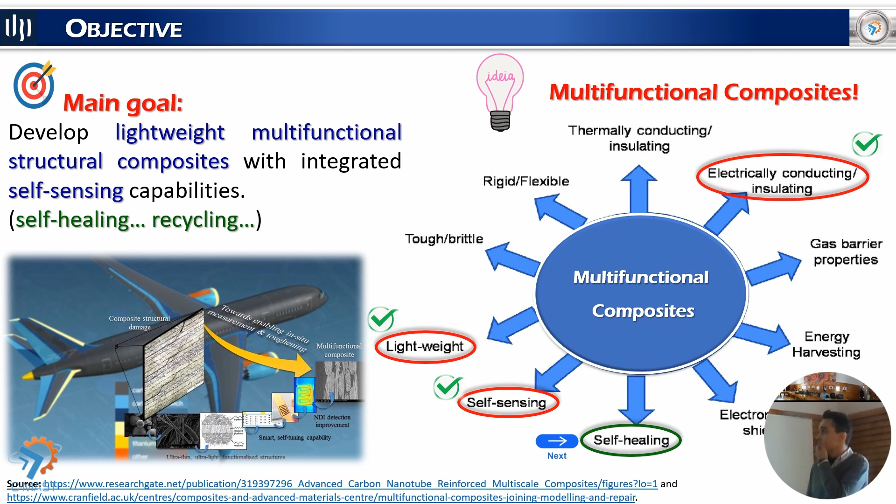This is the main goal of the project: to produce lightweight multifunctional composites that can perform the role of structural components in a specific application, for instance aerospace, aeronautics, and at the same time have the needed properties to present different characteristics and be at the same time a self-sensing system, a self-healing material, recycled - to develop multifunctional composites. The main function is structural, and the other ones give the material this idea of multifunctionality.

To understand a bit more and to introduce the importance of these topics in the advance of composite materials, I bring here some data related to the markets of composites, in this case advanced composites and fiber reinforced composites. Both markets are forecast to grow significantly in the next years in this decade, and the value of the market will grow for the next years.

This is important because we are researching new materials, new technologies in this area, and the value of this field is increasing. So probably if we develop good solutions, the possibility of application and transfer of the technology to the market is bigger, because the money being invested in these markets is also big.

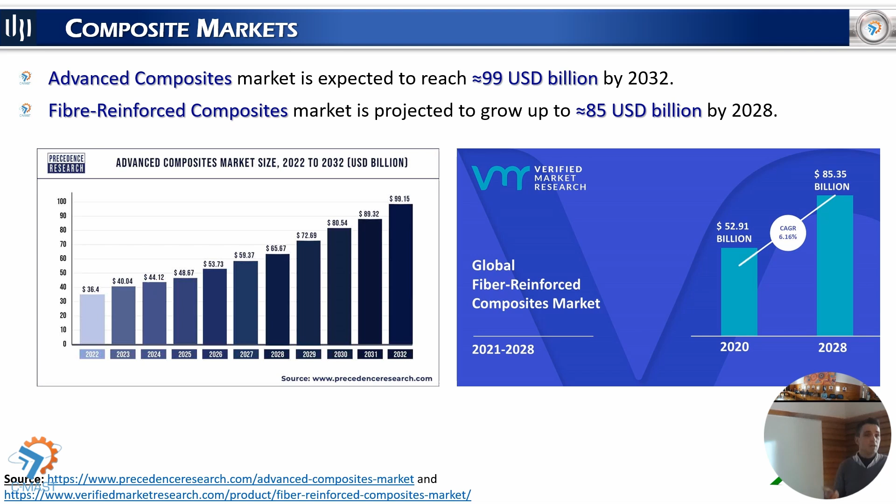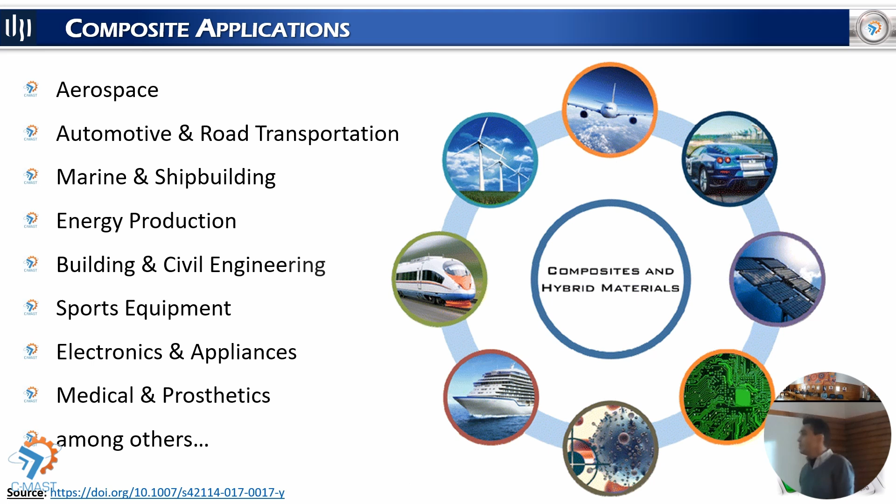These composite materials find application in different markets, in different types of industries - aerospace, automotive, probably the most representative and recognized for everybody, but also in energy production, civil engineering and building, sports equipment, electronics, medical devices, and other possibilities.

If we also analyze the numbers and the money involved in more specific markets like the marine market, wind turbines market, advanced polymer composites market, and also the aerospace market, the perspective of growth in the next years is also interesting, and the value involved in these markets will increase in the next years. This is a good perspective for us working in this type of solutions, since the market is growing and the possibilities of investment probably will increase also.

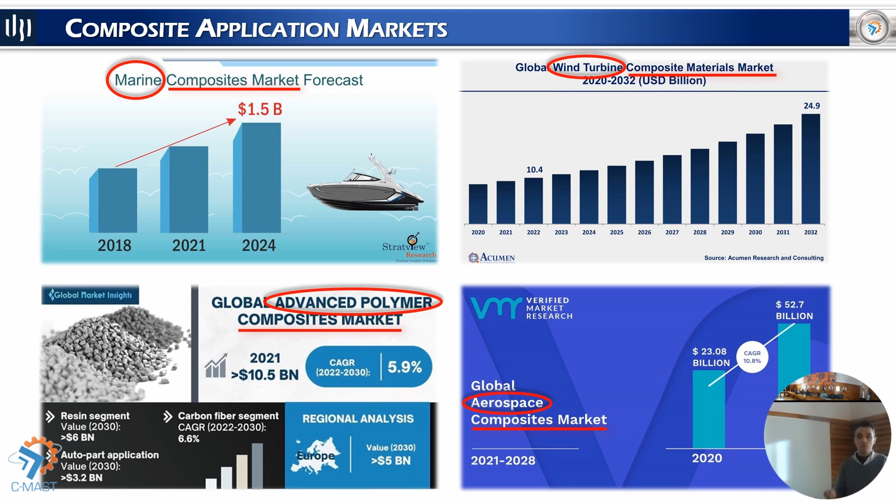Specifically the aerospace market, here we have two well-known aircrafts from two also well-known companies that present in their composition a minimum of - in this case we cannot see, but it's 50%, and here 53% - of composite materials. These numbers show the importance of this type of materials. The composite materials are being applied as half of the constitution of this aircraft. So the application of these materials is really important, as we can see here by these numbers.

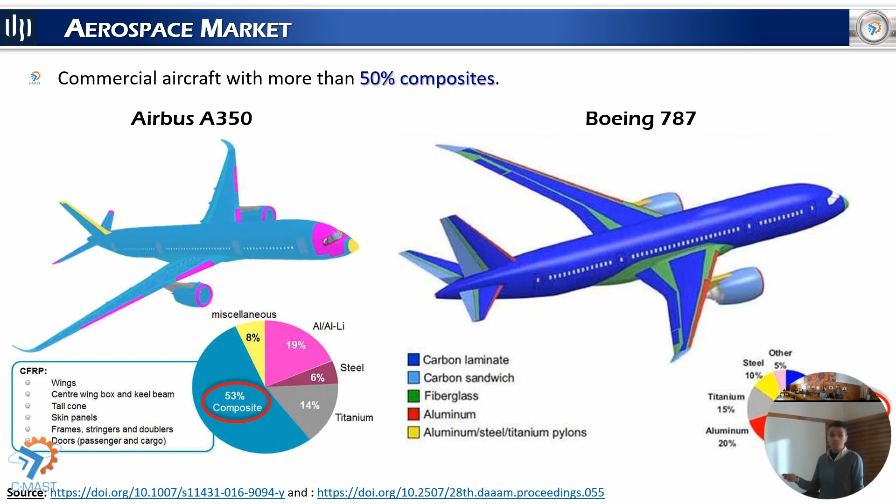Why are these composite materials so interesting for this market, and why has their application reached these levels? This is the main reason: the specific strength of this material is really high, even higher than conventional metal matrix solutions - steel, aluminum, titanium, nickel, and other metal matrices. The specific strength of polymer matrix composites is really high.

And when we are talking about the transport market, the weight of the structure is important, because less weight means less energy to move the structure, less energy consumption, less carbon CO2 emissions, and this is an important aspect of these materials and an important characteristic. This is why they are so applied.

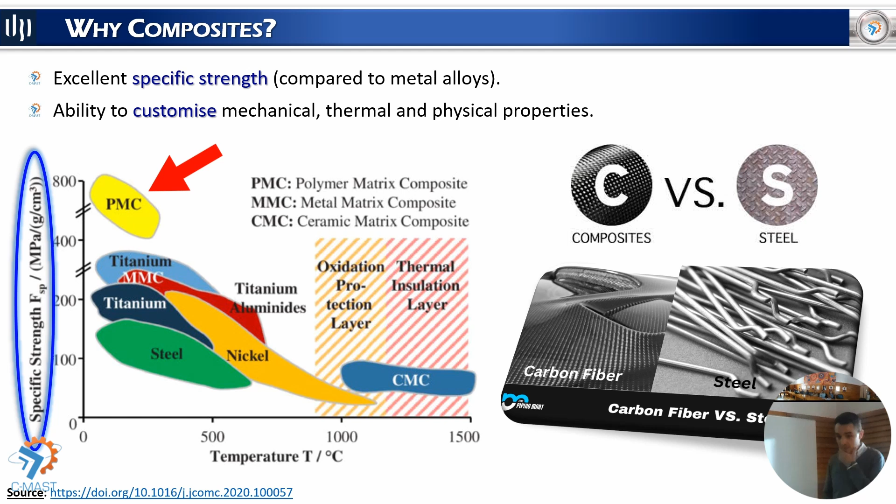However, the application of these materials has some limitations, and they present also some disadvantages. One of the main ones is their low resistance to impact. When an object impacts the structures, typically we have this type of damage propagation.

In the surface that is impacted by the object, we can see, or sometimes it's not so visible, a small indentation in the structure, in the place where the object impacts the structure. But there is a propagation of the damage through all the structure that is not visible in the upper side of the sample that is hit.

And in the opposite side of the surface that was hit by the object, typically catastrophic damage occurs. Fiber breakage, delamination, and this type of damage will really compromise the structure in its function. This is the typical damage that occurs during an impact occurrence, and this is a fragility of this type of materials.

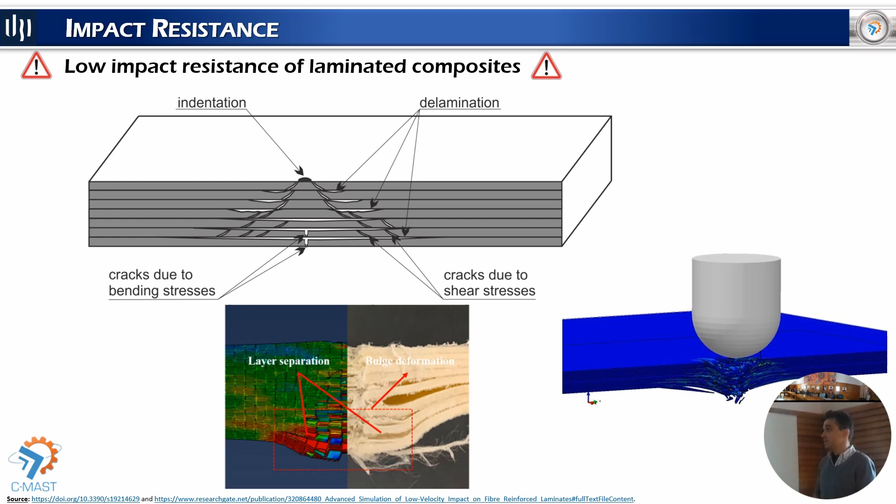Other issues and other limitations of the materials are related to the high carbon footprint that the synthetic polymers exhibit during all the life cycle of the materials, from the beginning, the petrochemical extraction, then during the utilization, and in the end of life. Typically these materials create big amounts of pollution in the water resources, in the lands, in the air, and this is also a big concern and a big limitation of the massive use of these materials.

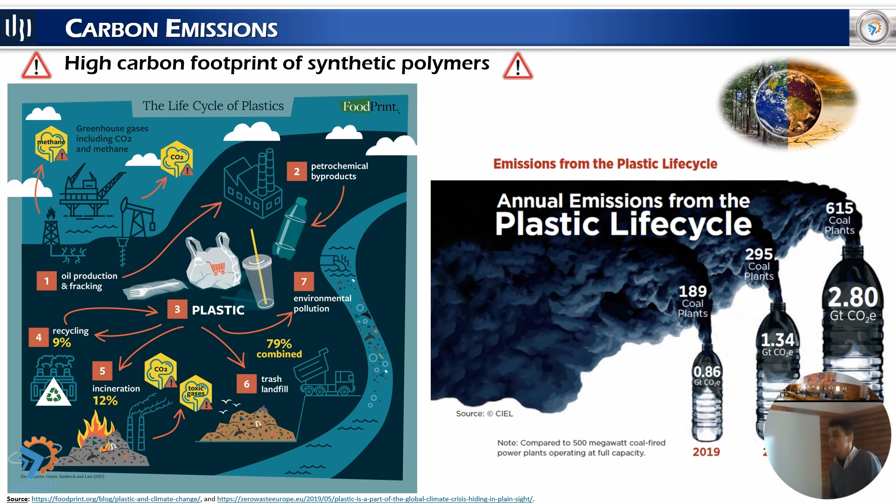So mainly these two limitations that I present are in the base of our motivation to develop this project. Our idea is to introduce the ability of self-sensing in these materials, and the structural material itself can perform what we call the structural health monitoring without the attachment of external sensors that can compromise the structure, the surface, and interfere in the aerodynamical performance of the material. So what we want is to endow the structures with the capability of becoming a sensor

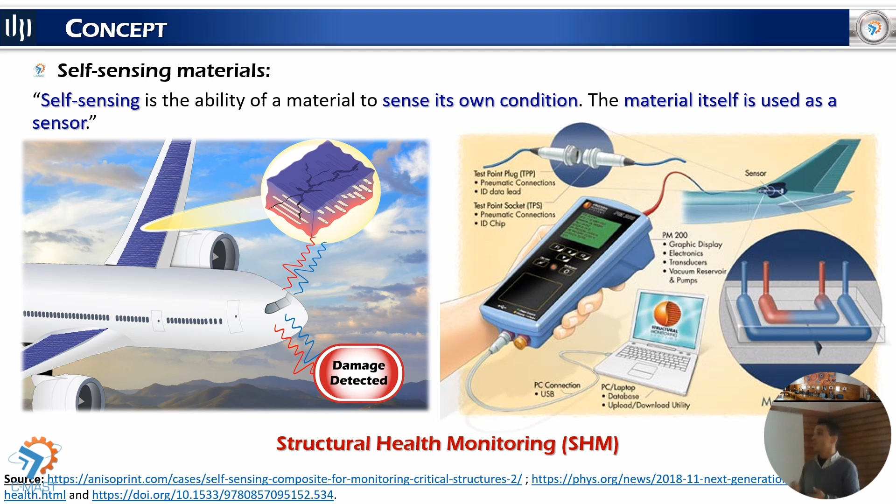itself, the structure. This is usually called self-sensing, the ability of the material to sense its own condition. The material itself is used as a sensor. So we don't need the attachment of extra sensors that can compromise the structure or affect the aerodynamical performance of the material. In our case, we are studying the piezoresistive self-sensing.

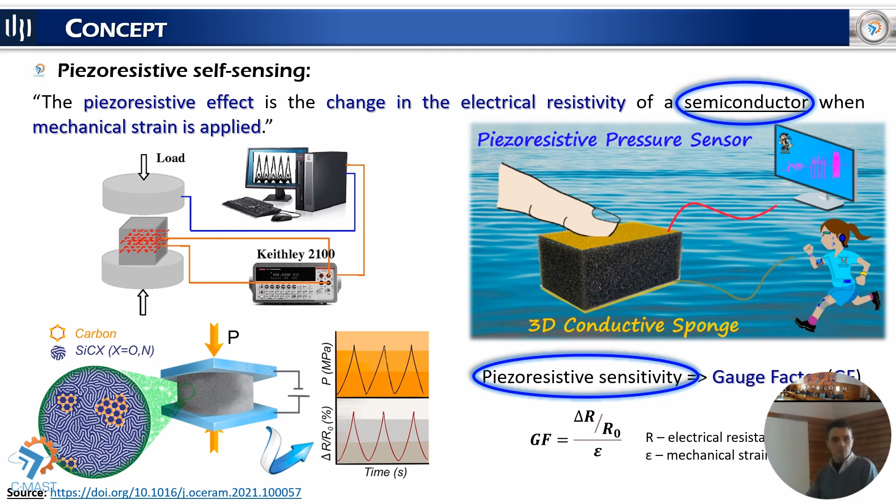The piezoresistivity is a property exhibited by some materials that consists in the change of the electrical resistivity of the material when an applied stress, when a mechanical solicitation is applied to the structure. Typically, we have here in these two graphs a representation. We have the curve of the variation of an applied stress, and the electrical resistivity also varies according to the applied stress to the structure. We will see this in more detail in the next slides.

To achieve this piezoresistivity effect in these materials, we need to change them, because typically a polymer matrix, which is the base of these materials, is an insulating material. And in this type of materials, the piezoresistive effect is not so visible or exacerbated in an amount that could be used for self-sensing piezoresistive systems.

So what we are doing is to dope and to add carbon nanotubes, which are electrically conductive particles, into the polymer matrix to make the structure semiconductive in the electrical resistance range. So initially, the polymer matrix is an insulating material. After, when we have some amounts of carbon nanotubes, the structure becomes semiconductive. And in this range, we can really observe the piezoresistive effect in the structure, and we can use it to develop the sensing solutions we are studying.

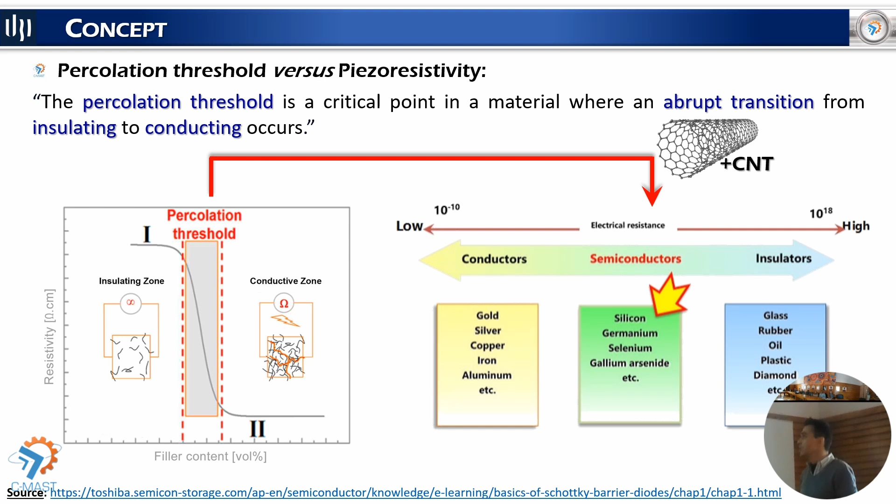The amount of carbon nanotubes that we need to add to the structures in our study is below 1% in weight. So we are talking about a very low percentage of this material.

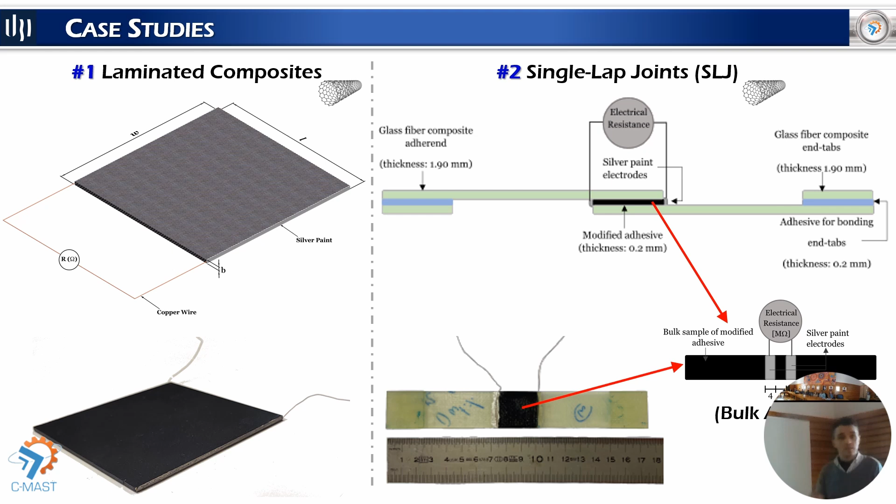So moving into the experimental results, I will present two case studies that we implemented in the laboratorial experiments. We studied this solution in laminated composites, typical composite materials used, for instance, in aircrafts and airplanes, and also in single lap joints, which is a solution very common also in aerospace structures, in cases where the bond of some components should avoid screws or the presence of holes that can compromise the structure. So we applied this concept of piezoresistive self-sensing in these two case studies.

For the manufacturing of the samples, we used glass fiber as the fiber reinforcement, carbon nanotubes as a nano-reinforcement, and the polymer matrix was a conventional epoxy resin. For the first case study, the laminated composites, we produced two sets of layered glass fiber composites. The first one, 12-layer composites of glass fiber epoxy, so pure epoxy with glass fiber reinforcement. This is the control sample. And in the samples in which we studied the piezoresistive effect, we had the epoxy resin with 0.5% by weight of carbon nanotubes.

For the second case study, we produced first the adhesive we used to bond the adherends. We studied the bulk adhesive with 0.5% of carbon nanotubes, and then we used this adhesive to produce bonded single lap joints with epoxy resin with 0.5% carbon nanotubes, and we used adherends of glass fiber also.

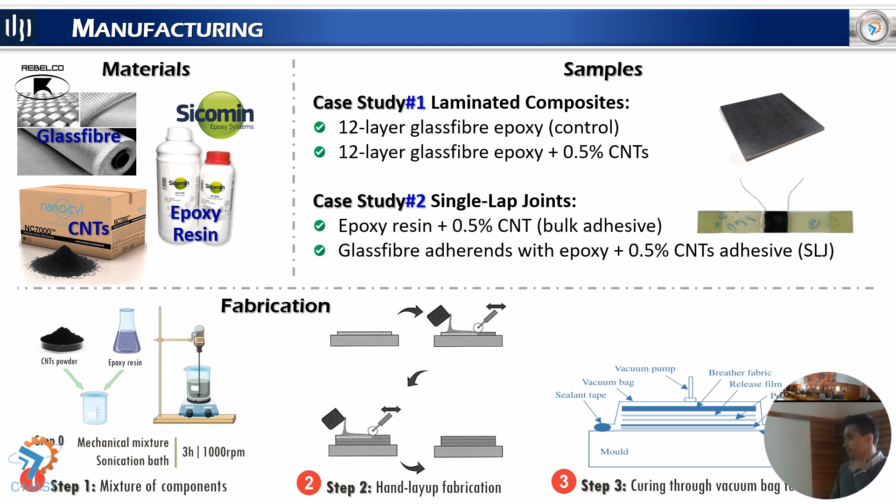In the first case study, we perform mechanical characterization of the samples, the typical and standard 3-point bending tests. We did cyclical tests and also monotonic tests till the rupture of the samples. We also performed studies of low velocity impact to understand how our structures behave in this kind of impact occurrence. As I said, it is a real concern in the application of these structures. During the tests, we monitor the electrical resistance with a digital multimeter.

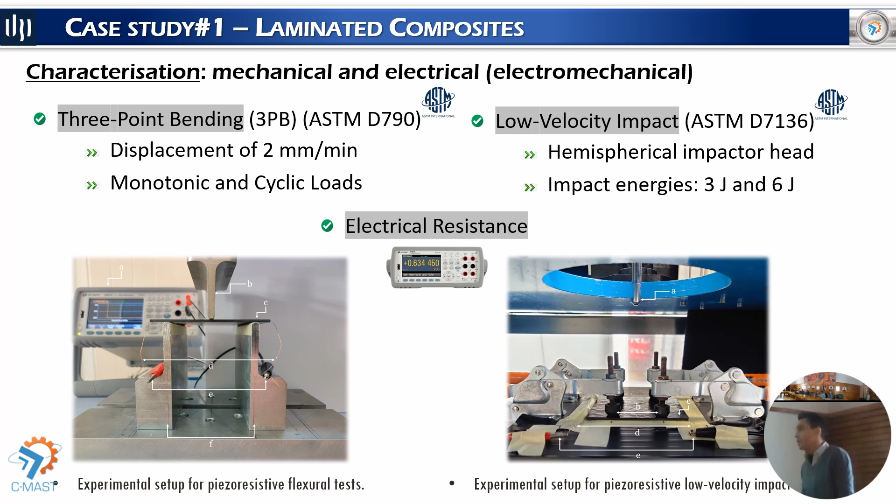Moving to the results, the first thing we did was to study the influence of the carbon nanotubes in the mechanical properties of our materials. As I said, we introduced 0.5% of carbon nanotubes in the laminate composites, so it was important to understand how the presence of the carbon nanotubes will affect the mechanical properties of the materials. We verified that in the samples before the impact tests, samples with carbon nanotubes present higher mechanical strength and higher flexural modulus, so the addition of the carbon nanotubes improves the mechanical properties.

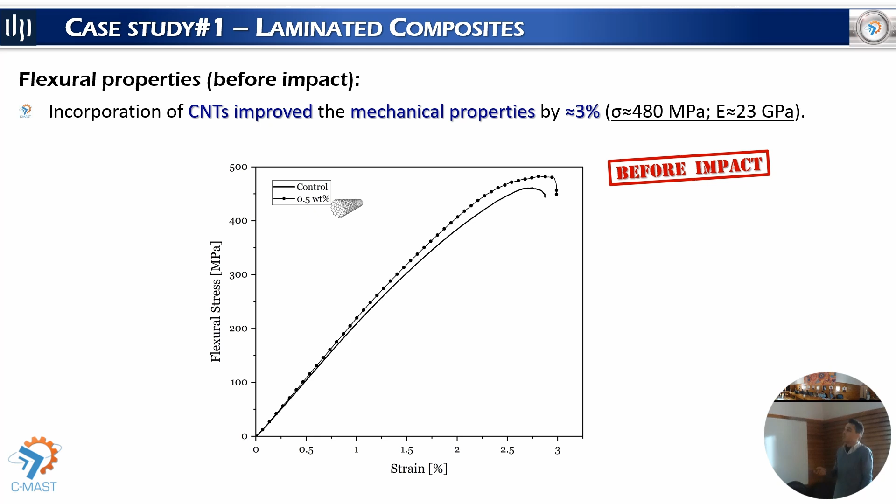These two microscopic images are interesting to show what I mentioned at the beginning of the presentation. Here we can see what happens in the composite structure in an impact event. Here in this zone impacted by the object, we can see the presence of an indentation, but the damage that occurred inside is not visible. And here, in this case of the 6 Joule impact, we see the indentation, but on the opposite side of the composite, we can see that big damage occurred. We can see fiber breakage, delamination, shear cracks. So this kind of impact really compromises the structure.

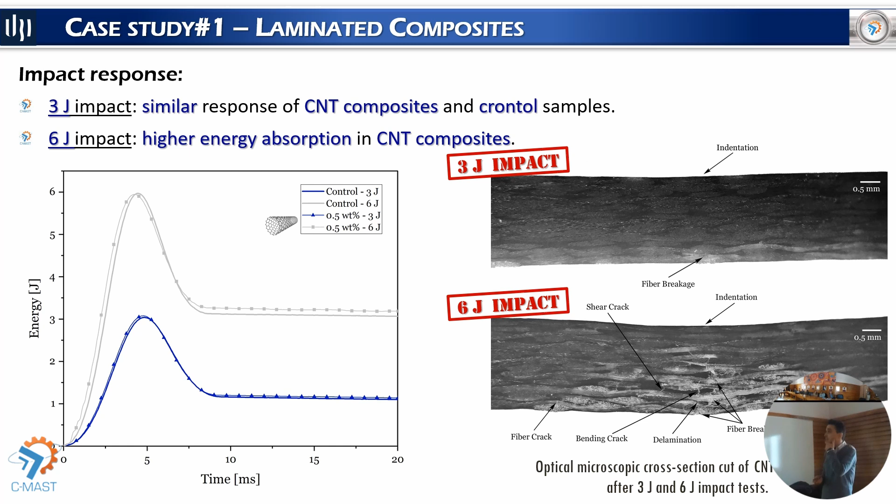This is why it's so important to try to monitor this kind of event by piezoresistive means, as I will show you in the next slides. We also studied the influence of the carbon nanotubes in the samples after the impact. Here we can verify that the composite samples with carbon nanotubes present a smaller reduction in the mechanical properties after the impact. Once again, the carbon nanotubes improve the mechanical properties.

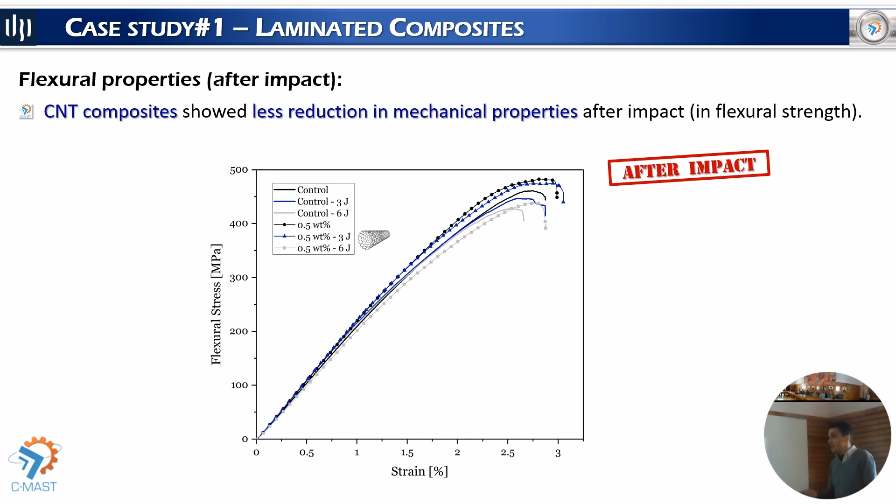Okay, now let's move to the electromechanical properties, which are, I would say, the main results that I want to show you here. We start by studying the piezoresistivity of these laminated composites under flexural experiments by 3-point bending tests. In this graph, the black line corresponds to the mechanical signal, the mechanical deformation, and the red line is the electrical resistance variation. We see an overlap of both signals during the 5 cycles of the experiment.

It means that there is a real-time synchronism between the mechanical signal and the electrical signal, and this is exactly what we want to achieve: a good relation between the mechanical deformation and the electrical variation that can give us an idea about the deformation being imposed on the structure. This good relation was observed in cyclical tests, but also in monotonic tests till the rupture of the sample.

We can see that when we apply stress, the electrical resistance of the material increases, and when we reach the limit, the maximum stress that the sample supports, we can see the appearance of some noise in the electrical signal, which means that some permanent defects are being imposed on the sample. This is exactly what we want to achieve: a good correlation between the mechanical part and the electrical part. If we measure the electrical signal variations in real time, we can have an idea about the integrity of the sample.

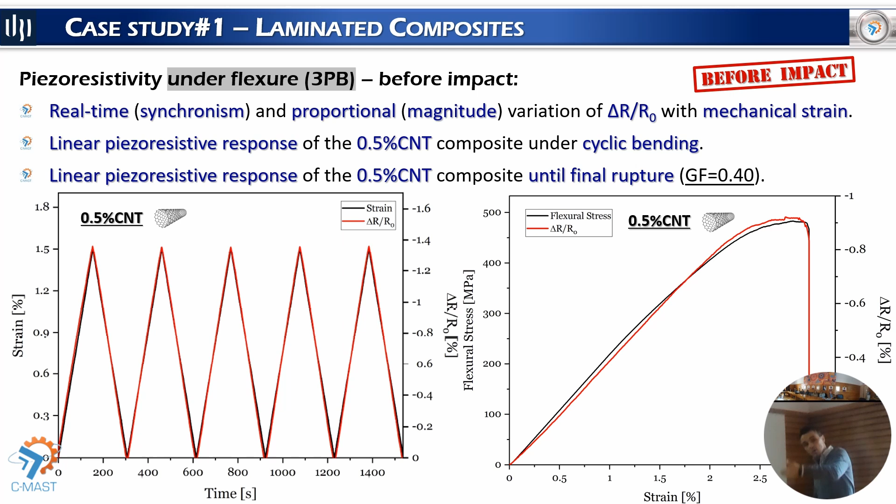These experiments are for samples before the impact tests. Then we study the same properties in the samples that were impacted, in this case 3 joules impact, and here we see the same behavior but with some difference that indicates the permanent damage of the samples.

We can see here some deviations of the electrical signal in red line against the black one that corresponds again to the mechanical signal. We can see here that we have some deviations during the experiment. This means that the sample that has been subjected to impact tests before presents some damage, and the correlation between the mechanical and the electrical signal is not the same as we have at the beginning. So this is working as a sensor.

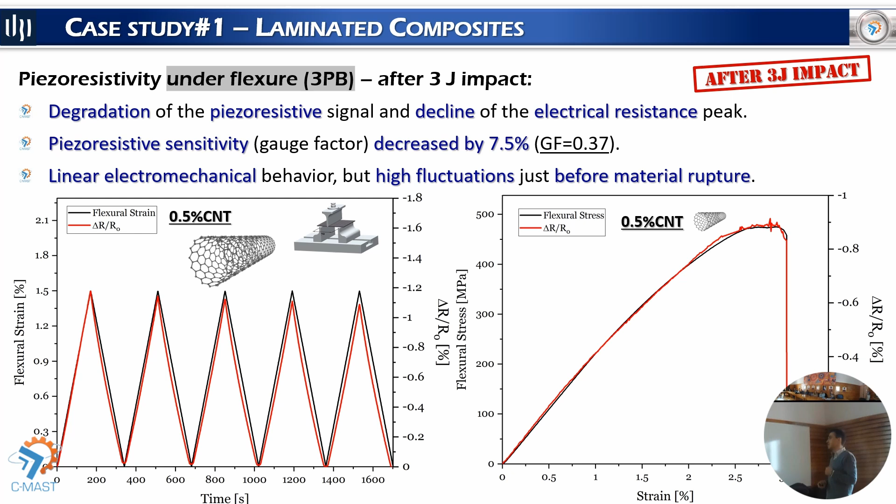In the monotonic test, until the rupture, we can see the same. The noise at the end of the experiment is even bigger than it was in the case of the original sample before the impact tests. We study the same after 6 joule impact tests. In these impact tests, we saw in the microscopic image that severe damage was imposed to the samples, and here the

deviation is even higher. Here we are in the cyclical tests, below or inside the elastic region of the sample, but we can see deviations of the electrical signal from the mechanical one during the cyclical tests, which means that severe damage was imposed to the samples. And here in the monotonic test it is even more evident. A lot of noise during all the experiments is a signal of mechanical damage.

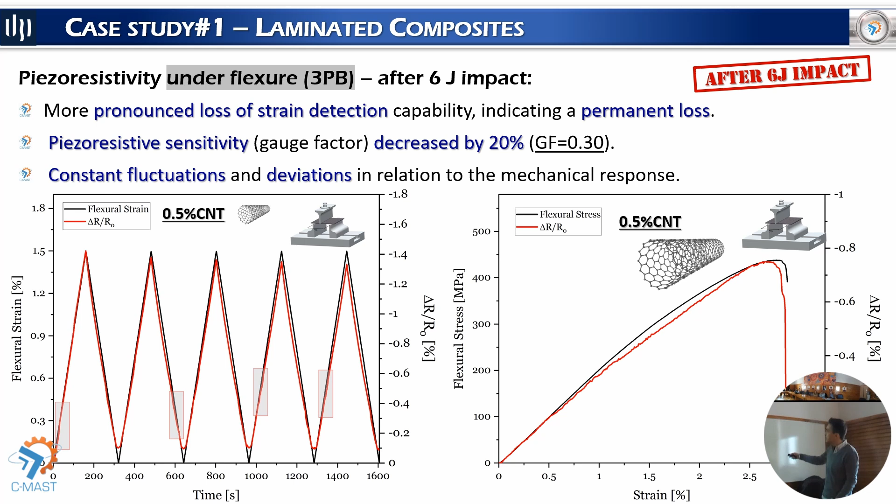We went even further and we controlled the electrical signal during the impact tests for both 3 joule and 6 joule impact tests. And here in this graph we have the electrical resistance variation as a function of the time during the impact tests. At the beginning, the resistance of the materials was very low compared to the values that were reached after the impact. So here we can see that immediately after the impact we have a significant increase in the electrical resistance of the materials. So the system was able to detect the impact occurrence.

But even more, by estimating the variation of the electrical resistance, we can have an idea about the energy that was involved in the impact. So the samples were able to detect the presence of an impact, and also, measuring the electrical resistance variation, we can have an idea about the energy that was involved in this impact.

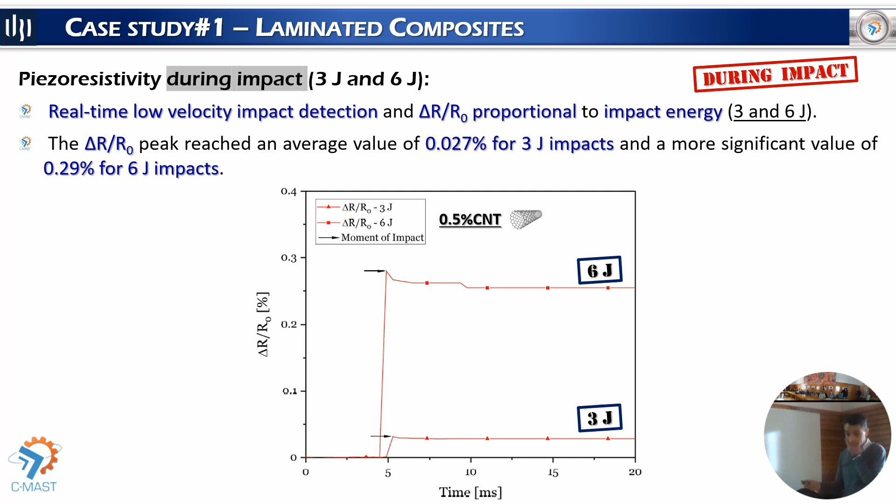So I would say that these results show that we are on a good way to produce self-sensing composites that are able to detect the presence of damage in real-time application, or also in a post inspection after the operation of the structure. Now moving to the second case study, the study of the single lap joints.

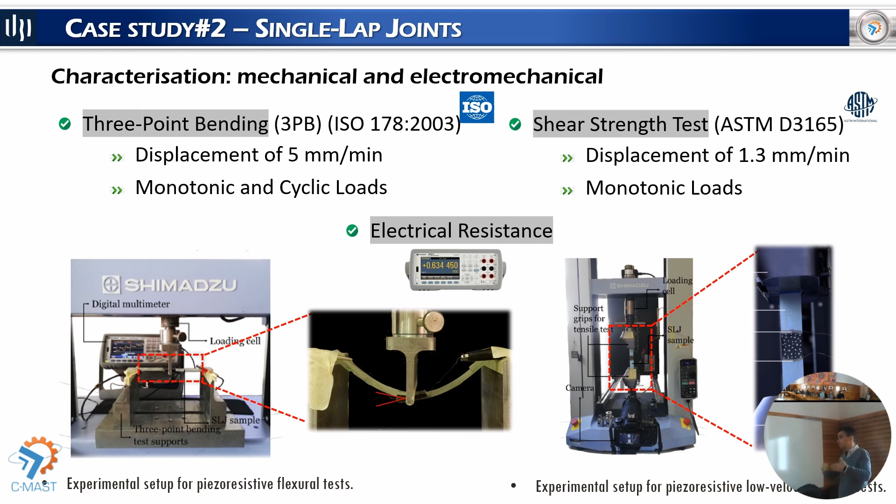These results of this case study, I would say, are a bit preliminary compared to the previous ones, and we will understand why. Here we also perform 3-point bending, in cyclical mode and in monotonic mode to the rupture of the sample, and we also perform shear tests on the single lap joint to understand how it behaves during the failure of the bonded joint. During the test, again, we monitor the electrical resistance.

Here we have the piezoresistivity of the bulk adhesive. So these results regard the bulk adhesive. We produced first the adhesive added with carbon nanotubes, and we study first the adhesive. And here we can see that the adhesive answers; it presents a piezoresistivity that was sensitive to the variation of the strain. We increased the level of strain and we measured the electrical resistance variation, and we observed that there is a correspondence between these two signals.

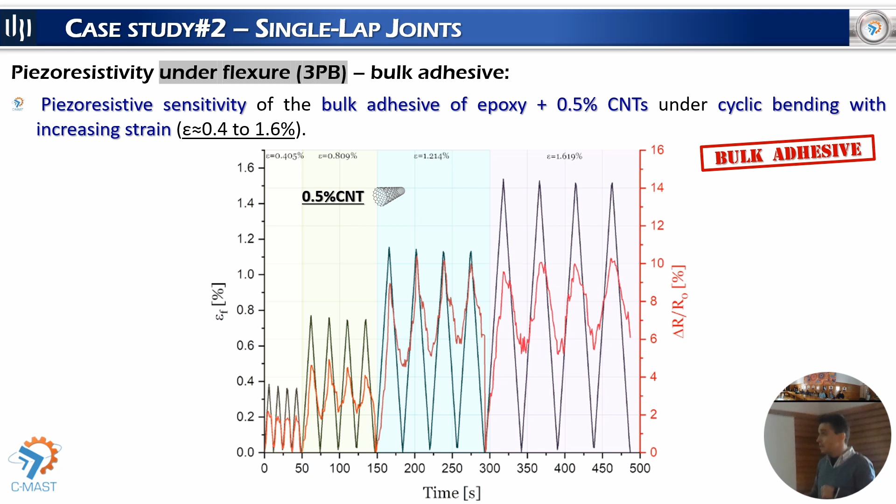But here the electrical signal is not so clean like it was in the first study. In any case, this signal is the signal measured directly by the multimeter. This signal was not filtered, was not optimized, so we know that we have space for some improvements here. But the most important conclusion of this test is that this adhesive, composed of epoxy resin added with carbon nanotubes, is really sensitive, with electrical resistance variations when mechanical stress is applied to the bulk.

Then we applied this adhesive to glue adherends to build the single lap joint, and we test again the piezoresistivity of the structure in cyclical 3-point bending tests in flexural mode, of course. And here we verify again that when the stress is applied and removed, the electrical resistance varies again. But here the variation is the opposite of the first case. Here we have a negative piezoresistivity. What does this mean? In the first case, when we applied stress, the electrical resistance increased. Here, when we applied stress, the electrical resistance decreased.

This is not important for the sensor building, because the most important characteristic of this system is the presence of a variation of the electrical resistance when the mechanical stress is applied. The way that it varies is defined by the movements of the electrical charge carriers inside the polymer matrix during the experiment. But this is not so important. What is really important is this variation, this amplitude of signal during the test.

We also perform long-term tests, also flexural tests, to see the stabilization of the signal over time. Here we perform 100 cycles, and we observe that after 25-30 cycles, the signal tends to stabilize in a plateau value and with a regular amplitude, which is also important to make some conclusions about these variations.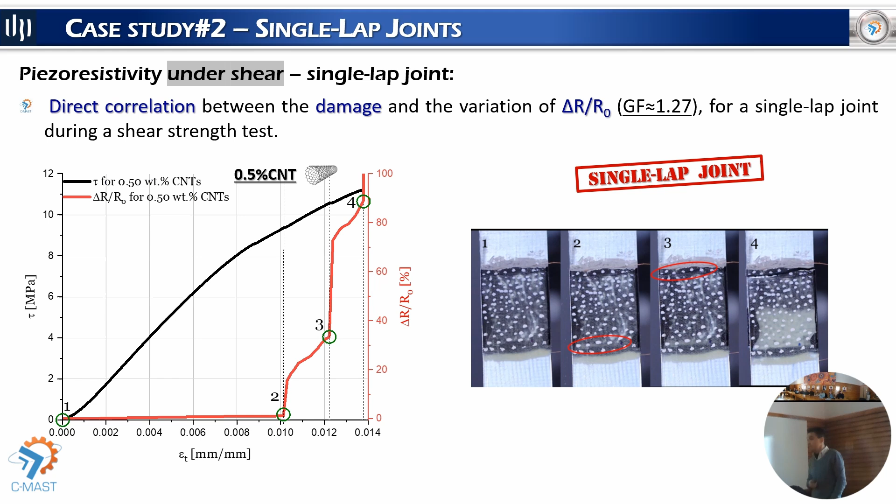So once again, the real-time monitoring of the structure, in this case a single lap joint, with the control of the electrical resistance can give us an idea about the integrity of the joint. To conclude, some final remarks and conclusions.

First, in the first case study, the laminated composites, we observed that there was a good relationship between the relative electrical resistance variation and the mechanical strain in bending. And we also observed that we can detect the occurrence of an impact event, and at the same time we can have an idea and estimate the energy that was involved in this impact.

In the second case study, the single lap joints, we also observe a good piezoresistive trend that varies according to the different strain rates that were applied in the bulk adhesive in bending mode. We also see a stabilization of the signal over time for the single lap joint, and in the real-time damage monitoring, we can detect the different moments and the different cracks that happen in the joint during the shear tests. So, general conclusions about the work and the project.

First, the addition of the carbon nanotubes imparts piezoresistive properties to the composites, which was the main objective of this additivation. Second is what I call the double positive effect of this additivation. The carbon nanotubes in this percentage of 0.5 wt% also improve the mechanical properties of the composite, so it is an additional good result of this manufacturing process. And as a final conclusion, for now, we would say that these composites are really promising candidates to produce structural health monitoring self-sensing systems based on these materials.

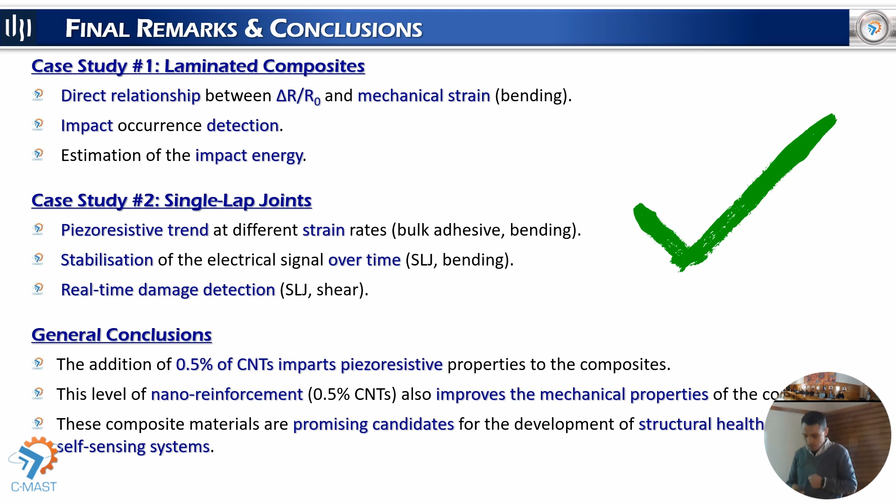The impact that we expect with this technology. So first, with this technology, we feel that it's possible to detect damage early, in an early stage, and avoid that the propagation of the damage will compromise the structure. We can also propose continuous and real-time monitoring of the structures, and with this probably reduce the maintenance costs of the structures in which these materials are applied. As a consequence, we increase the safety of the system.

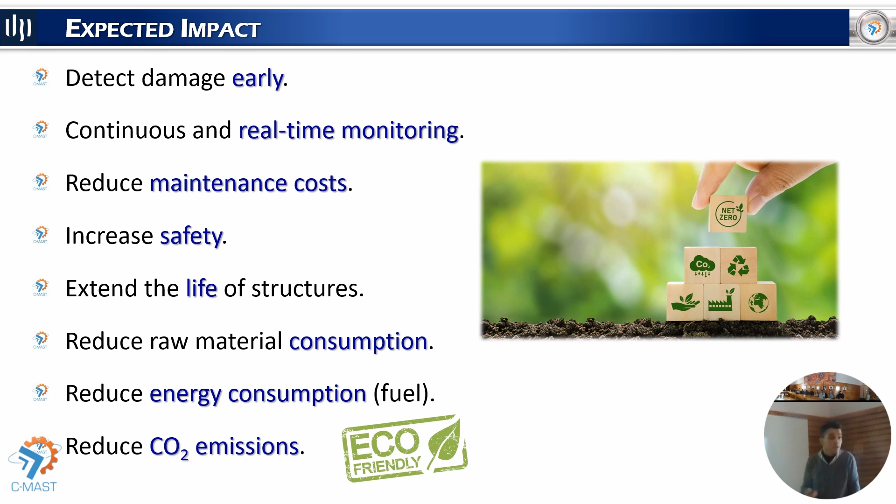We can also extend the life of the structures, and if we extend the life of the structures, we will reduce the consumption of raw materials, because we will need new raw materials later with these systems implemented. So, as a final consequence, we will reduce the consumption of energy, in this case fuel, and reduce the CO2 emissions.